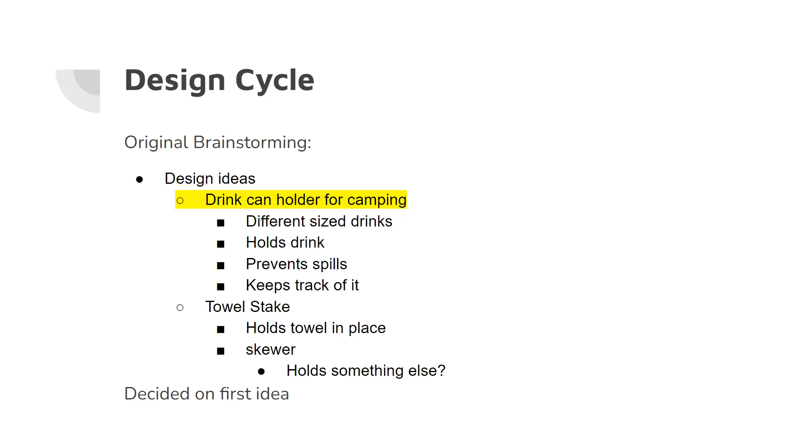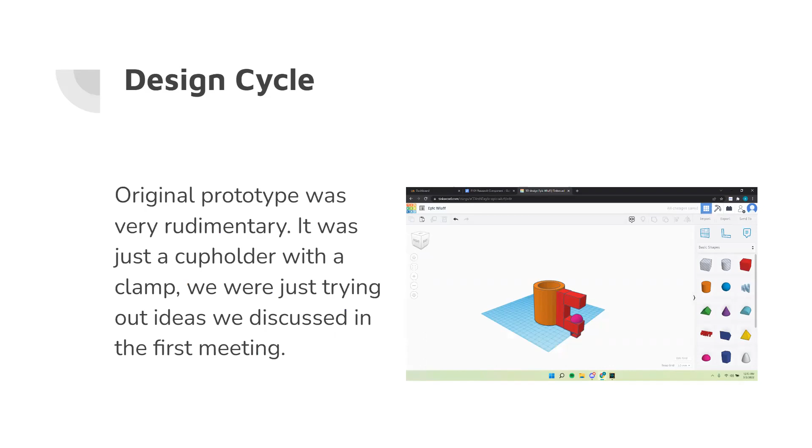So the original prototype here was Tinkercad, and it's very rudimentary. It doesn't have our two functions, but it helped us get a good idea of what we were doing and what we were looking at, sort of sizes and all those sorts of very basic information. But we really just needed a launching point.

And our second prototype, it was more on another idea we were having, where it has more of an axis. So it's a little more of a complicated design, but it's still not advanced enough, and it doesn't have our multiple functions yet, but it's really just another advancement on our original idea of a cup holder.

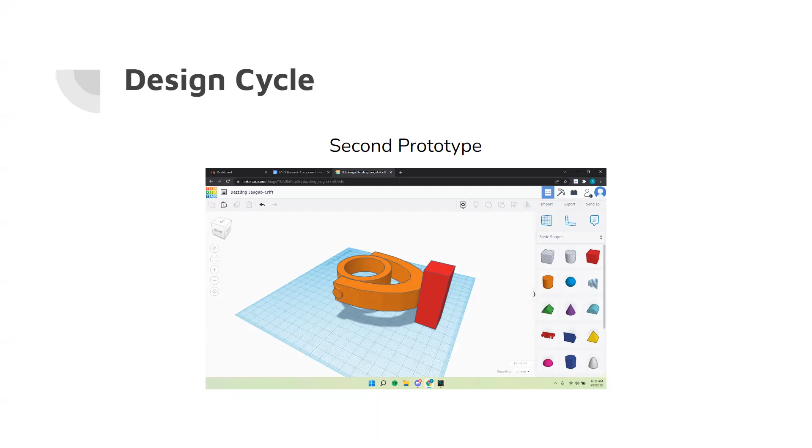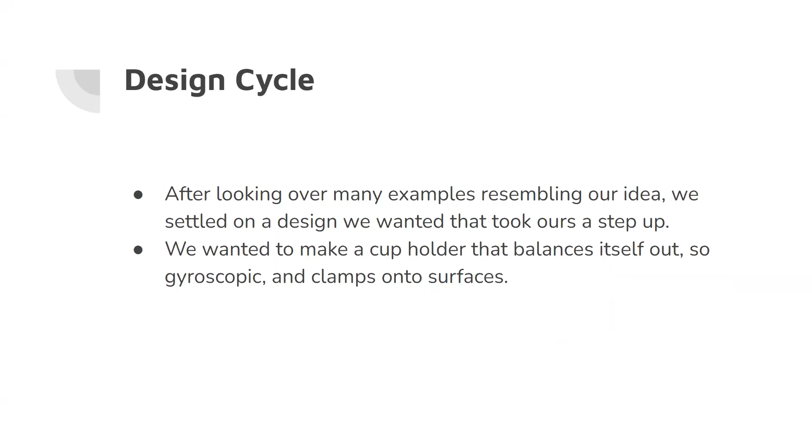So after looking over many examples resembling our idea, we settled on a design we wanted that took ours a step up. We wanted to make a cup holder that balances itself out. So we went for a gyroscope, and we wanted it to have the ability to clamp onto surfaces.

So this was the first SolidWorks design, which got the general shape and size of our solution. It featured a base cup holder that had axles coming out of the side on the top, which attached to an inner ring and an outer handle.

When reviewing the functionality of this, the gyroscope mechanic didn't work as we intended because it only rotated on one axis. To fix this, the axles needed to attach from the base to the inner ring, and then another set of axles needed to attach the inner ring to the handle in the other axis.

Another problem with this design was that the axles needed to be held in place because they would have just fallen out. So we solved this by changing the axles to screws. The screws were screwed in tight for the outer layers, which kept that section fixed in place. Meanwhile, the thinner shaft of the screw wouldn't actually screw into the inner layers, and this allowed the cup holder to rotate on an axle.

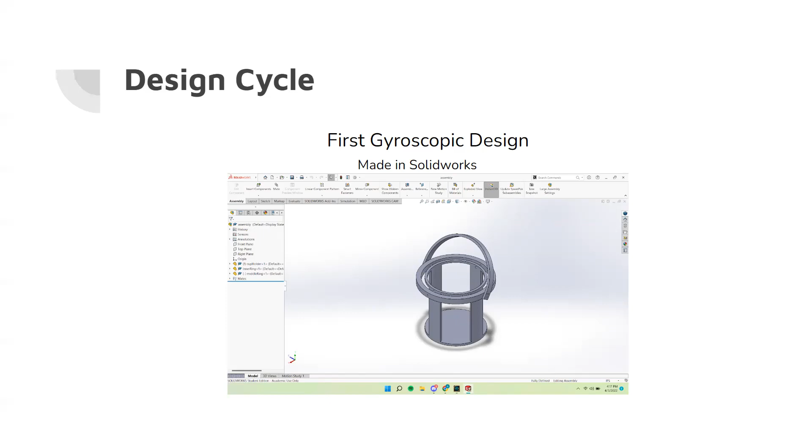For the second function of our design, the gyroscopic cup holder needed to be attachable. We found the best solution for this to be a simple clamp. The clamp would attach to the end of the handle, and the screw would be inserted through the hole in the clamp. When attaching a bar, rod, etc., the screw can be screwed in to make sure that everything is tight.

And additionally, a removable cap, which is the part on the bottom right, can be attached to the screw to even out the pressure on a flat plane, or removed in case you need that extra space. Luckily, our first prints were successful, and we only had to assemble it to finish as long as there weren't any setbacks in this process.

So the assembly of the parts, as depicted in these pictures here: first of all, when first printing the whole model straight from SolidWorks, it ended up being too big on our printers. So we had to scale it down by around 60%, which you can see on the first picture on the left. And it ended up fitting water bottles and soda cans pretty perfectly. In the second picture, you can see it fully put together.

We also had a third ring in there just as a placeholder until we were able to get the actual third ring. Putting in the screws was interesting, especially the ones connecting the inner ring and the middle ring, just because they had to have some space between them so it could actually rotate properly. But the outside ones we were able to screw in completely.

The second parts that we ended up making, you can't see on the outer ring, but the difference between the first one we made and the second one is it is a bit larger, and there's a hole in the middle so that we can put the screws in. The screws were a pretty tough thing to figure out because we didn't put threads in our original 3D print. So we had to find ones with sharper edges so that we could actually screw it into the plastic.

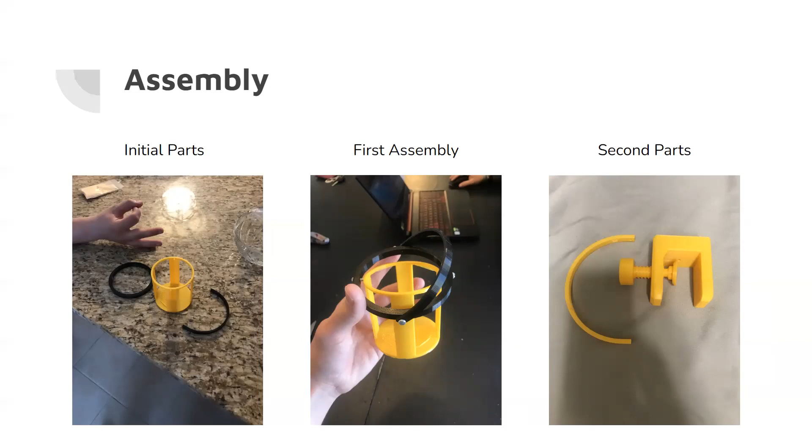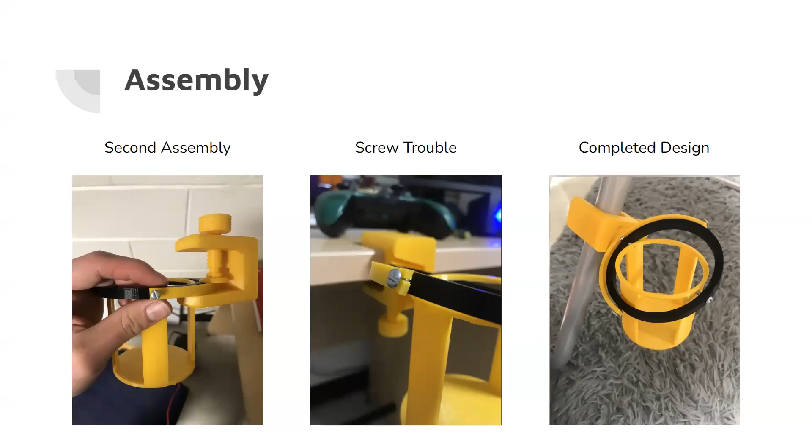So some advice and reflection. I wish that I was more careful with the assembly so that we didn't have any kind of splits in the plastic or anything like that. And I wish we sort of started printing earlier because we banked largely on us finishing with the first design. If we started earlier, we'd have a bit more wiggle room. I feel like we would have been more comfortable.

And I feel that making physical sketches for each part would make sure that the dimensions were correct, they made sense, and that we all knew what it would look like. Right, and that is the end of our presentation.